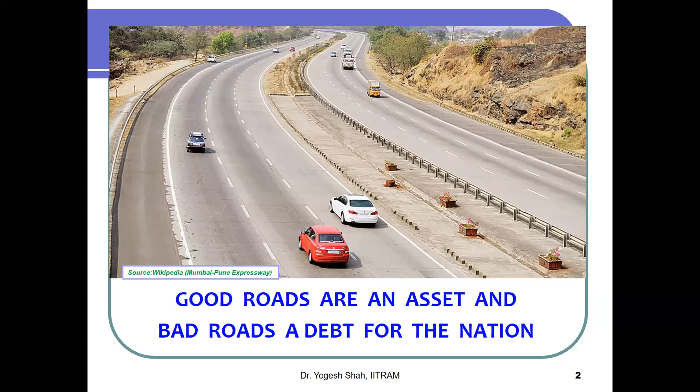So this topic of pavement evaluation is basically a part of the asset management system, we can say. If we broadly try to look at what is an asset management system, this asset management system diagram is with reference to transport infrastructure facilities. It might not include other components of infrastructure, but mainly I'm focusing on transport infrastructure facilities.

With reference to that, if we just try to see this diagram of asset management, there are different components which include tunnel management, bridge management, road furniture management, and winter management. Specifically in regions where there is heavy snowfall in winter seasons, you require a special management system and skills to clear off that snow so that traffic may not be stopped for a longer duration. And one component that you can see is pavement management system.

I'm just trying to open the pointer. Is it visible? Red pointer, is it visible?

Any one of you can just verify. Okay.

Pavement management system is one component of asset management, and under that pavement management, one part is your pavement evaluation. So pavement evaluation is again a very important component of a pavement management system.

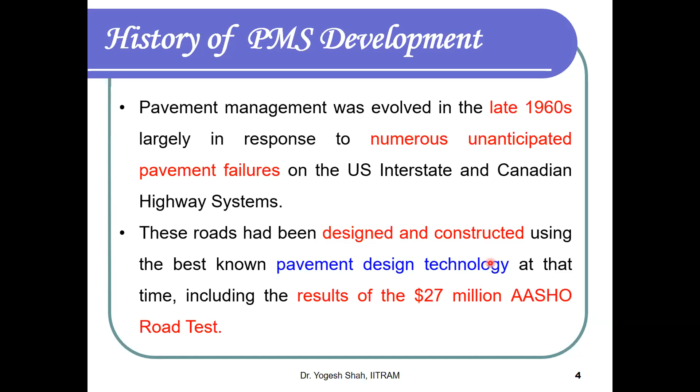They conducted a test track which consisted of both flexible and rigid pavements, constructed with different types of materials and mixes in different sections. Over a period of almost 9 to 10 years, they collected data related to the failures and distresses that take place on the road surface with time, age of the pavement, and other parameters, and then analyzed it. That is how the pavement management system evolved.

What is the benefit of PMS? I will just quickly go through these parts.

If we talk about pavement management system, the title makes clear that we are supposed to manage our pavements. So when we say manage, we are more focused on maintaining or managing the maintenance of your pavements. It gives you answers to various questions, like what is the need, why you want to go for a PMS. The answer can be that looking at the condition, you may say that your road is not in a serviceable condition, and that's why you want to go for maintenance of the pavement.

The second question is, how much money will you require? Third, let us say you require X amount of money, but you have only X minus N amount of money available. Then the question is how to optimally use the available resources. That can also be an answer obtained from a properly designed pavement management system.

The next set of questions can be, what is the best time to apply some sort of maintenance to your pavement? What kind of treatment will you use for a particular type of failure, and what strategy should you follow?

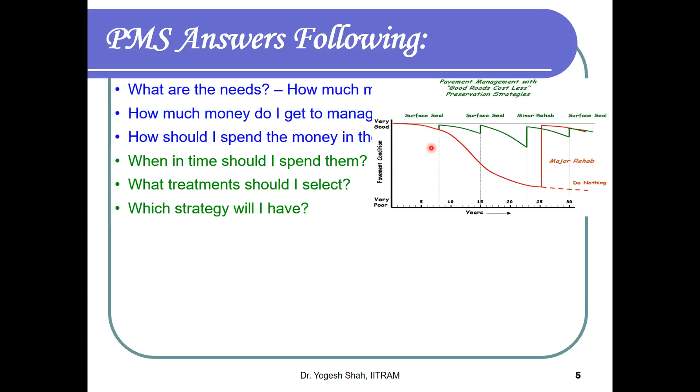Then if we talk about treatment, there are four different types generally available: routine, preventive, rehabilitation, and reconstruction. As you go from top to bottom, the type of treatment given is of higher quality, and the cost of maintenance also increases. Obviously, reconstruction means your pavement is completely failed and you have to reconstruct it.

So that is your second point, that you have to decide wisely what kind of treatment is to be applied. The third is strategy. Here also we generally have two strategies. Either you go for fixed maintenance, that is, you schedule it every 3 years or 2 years, and carry out an overlay on top of the existing road, or second, a condition responsive approach.

You carry out a proper evaluation using various evaluation techniques. You collect the data for distresses, and then decide the type of treatment based on the condition of your existing pavement. So that can be the strategy you may like to adopt, any one of those.

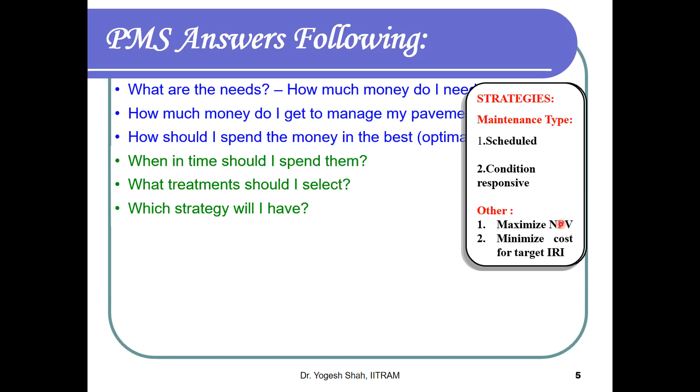And similarly, if we talk about with reference to the economic parameters, NPV is net present value. That is one economic indicator, like what will be the maximum return if you are investing something. Obviously, anyone investing a huge amount of money will expect a good amount of returns from that investment. So if you are having two or three options for treatment, we generally have a strategy to take the one which is going to give you the best return from your investment.

At the same time, the second strategy can be minimize your cost to a target IRI. IRI is basically a roughness index, the International Roughness Index, which is one sort of parameter to measure road unevenness. The unit for IRI is meters per kilometer, that is the total amount of unevenness in meters per kilometer of your road length.

So if you go for the second strategy, let us say your existing IRI is 4.5. Now you have two options. One is you maximize NPV, so in maximizing NPV, it will select any one option where your IRI will be fixed at 2.5. That is the best possible, but obviously the cost also will be high.

But if you go with the second option, that is minimize the cost to target IRI, then you can fix your IRI. If my current IRI is 4.5, I want to target it only up to 3.5, I don't want to go lower than that. So accordingly it will give you the option that this is the maintenance option which will give you an IRI of 3.5, and obviously the cost of investment is also going to be less.

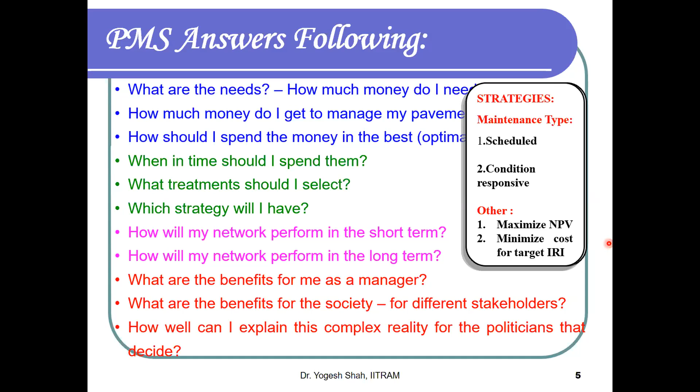Obviously, when we gather a huge amount of data at the time of evaluation, we can use that data for research purposes. We can develop various models which will help you in predicting the distresses in future. We can also have models related to cost, what is the total cost over a period of 10 years required to maintain the road in a particular serviceable condition, and so on.

So now coming to the main content of the presentation. Having this background of pavement management system, now we are going to talk about rigid pavements and the pavement evaluation techniques. In the first few slides, we are going to just have a highlight of what are the available IRC guidelines for rigid pavements. Those who are dealing with concrete pavements should at least be aware about these different IRC guidelines which are available. IRC is Indian Roads Congress.

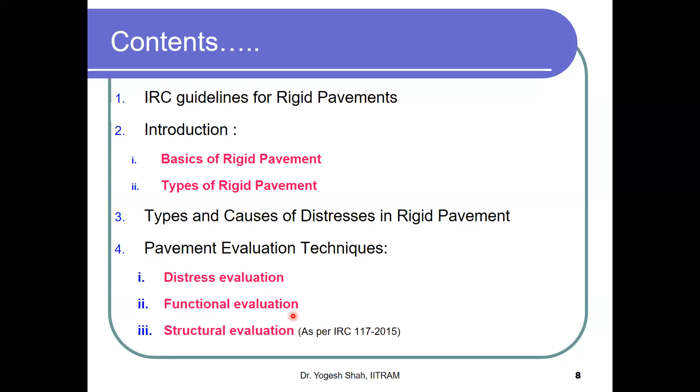So this is the first list of the codes which are relevant to the design of concrete pavements. I have prepared it into three categories: one is for design, second is for maintenance, and the third one is for construction. So these are different codes for design of concrete pavements. Obviously, there can be different components of a concrete pavement which can be designed using these IRC codes. So here IRC 58/2015 is the code which we generally use for designing plain jointed rigid pavements for highways.

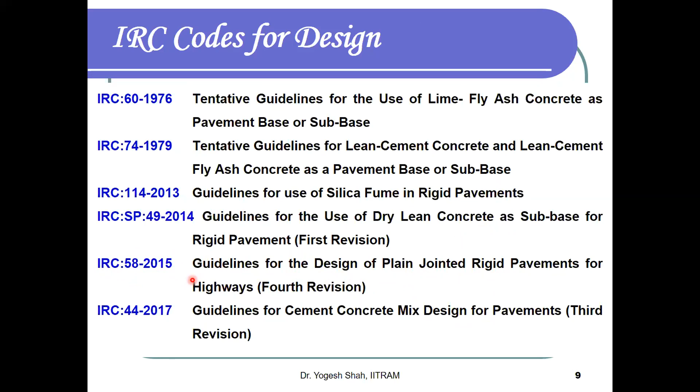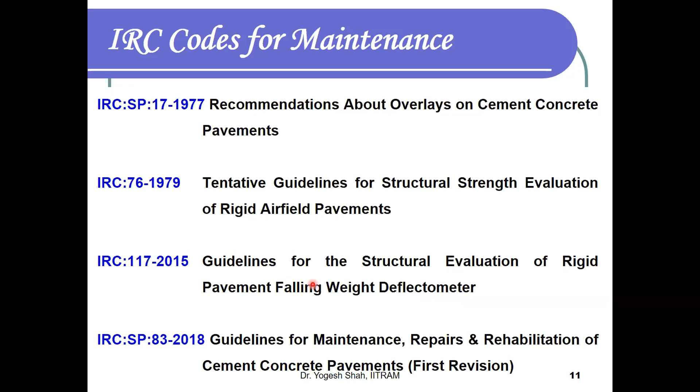So falling weight deflectometer is one latest equipment which is used in order to measure the deflections on your concrete pavement. And based on that, we can have an idea about the remaining service life of your pavement, whether it is in a condition of transferring the loads properly or not, whether there is some void formation in your concrete pavement or not, and so on. This kind of analysis can be done using this FWD. That also we are going to talk about at a later stage.

Here I would just like to mention a few important components of rigid pavement. One is dowel bars. Dowel bars are generally provided across the transverse joint, and they are one of the load transfer devices which are used. So whenever a vehicle load comes across this joint, because of the dowel bar, the wheel load from one slab may be transferred to another slab without having any cracks or faults at your joints. So for that, we have these dowel bars provided at a transverse joint.

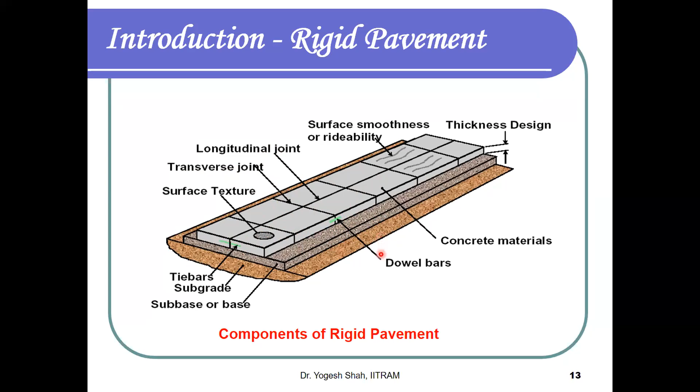Similarly, along the longitudinal joint, we have tie bars. More or less a similar function we have for tie bars also. The other components are already known, so we are not going into much detail. Why I'm focusing on dowel bars and tie bars is because we are going to talk about them at a later stage under pavement evaluation techniques also.

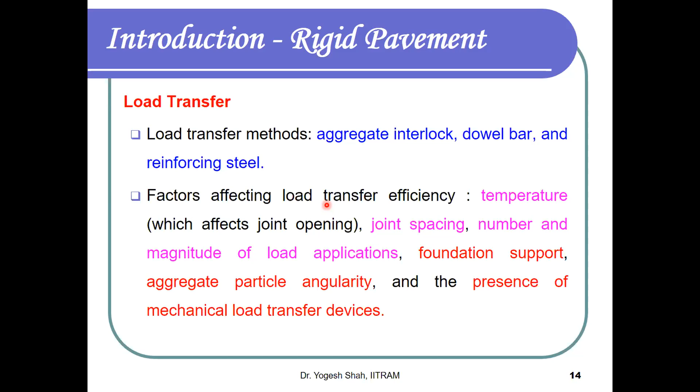There are many factors which affect this load transfer mechanism. When we talk about pavement evaluation techniques, we are also going to talk about the failure of the load transfer mechanism, like when we can say that your pavement is not effectively transferring the load. There can be many reasons: failure of the dowel bar, rusting of your dowel bar or tie bar, dispositioning of the dowel bar, and so on. That we will discuss again at a later stage.

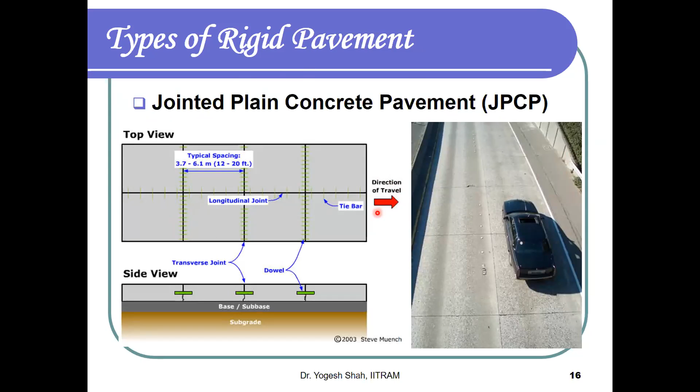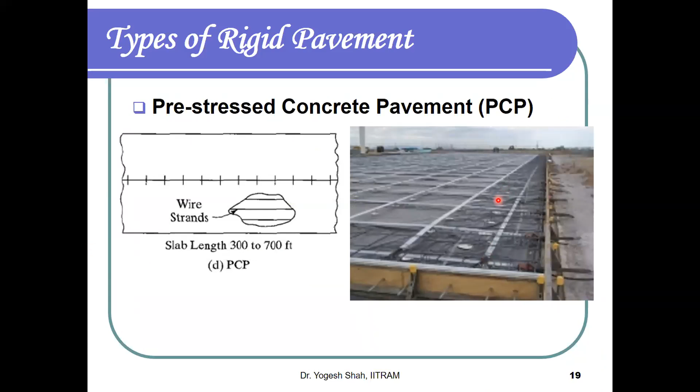Then joints. As I told, these are basically the discontinuities that we provide in the concrete pavement. If you are going for CRCP, then we don't have any discontinuities. But in the case of JPCP and JRCP, we have joints at regular intervals, and there can be transverse joints as well as longitudinal joints, as I have already shown you. Transverse joints can further be designed as either a contraction joint or an expansion joint. Expansion and contraction joints are provided to cater to the variation in stresses due to temperature variations.

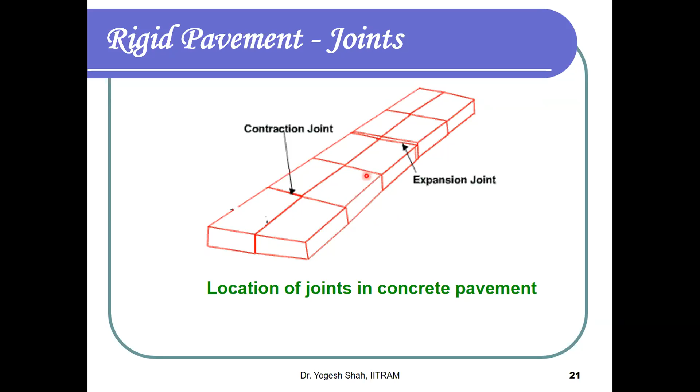Actually, for the provision of joints, we also use a special machine to cut the joint. Once you lay the concrete, after it has initially set, maybe 6 to 8 hours after laying, we cut the joints, and the depth of the joints should be specific, and the regular intervals or spacing between the joints should also be as per the design.

Then we come to the different types of distresses in rigid pavement. This is important to know, because unless you are aware of the different types of distresses, when you go for pavement evaluation you will not have an idea what this distress is and what can be the best treatment for it. So distresses, or we can say failures, in rigid pavement.

I have already discussed what a structural failure and a functional failure are. Based on those guidelines, we can classify distresses as cracking and surface defects. Surface defects means it is only on the surface; it has not penetrated into the depth of the pavement. Then joint defects: the failures or defects we find near the joints, whether a transverse joint or a longitudinal joint, we call joint defects. And there are a few other miscellaneous defects which don't fall under the previous three categories.

If we look at the classification under cracking, we have two divisions: structural distress and functional distress. As I told you, structural distress means it does not allow proper load transmission to the lower layers, because either heavy deflection is there or a huge crack is there in your pavement, so the load is not being transferred. The various structural crackings observed in a concrete pavement are transverse, longitudinal, diagonal, corner, etc.

On the other side, functional distresses only affect the riding quality or the skid resistance of your pavement: shrinkage cracks, edge cracks, durability cracking, and so on.

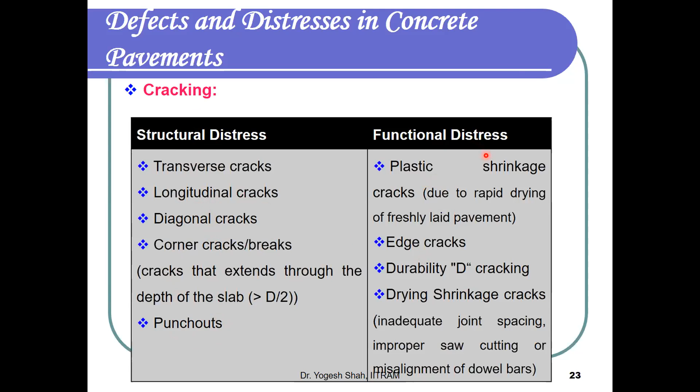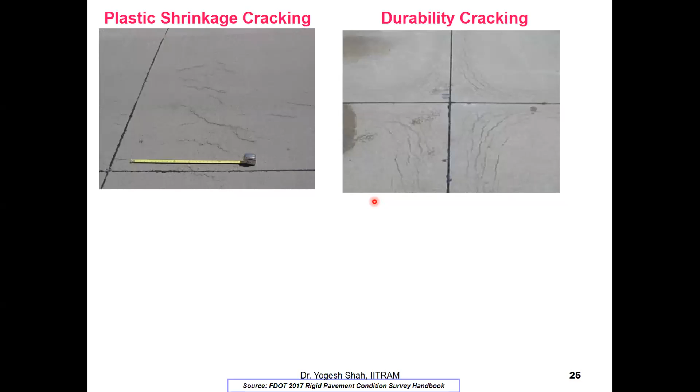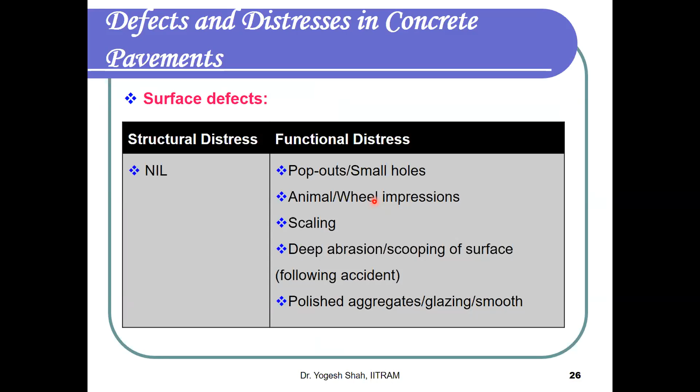And these are functional failures, which just affect the riding quality and smoothness of the pavement. Similarly, surface defects are only on the surface and have not penetrated into the pavement, so no structural distresses come under surface defects. All these defects come under functional distresses: small holes, scaling of concrete, deep abrasion, and polished aggregates. These are the types of functional distresses under surface defects.

The next category is joint defects. Under joint defects we also have structural and functional distresses. The important structural distress under joint defects is failure of tie bars or dowel bars. As I was explaining before, if the dowel bar you placed is rusted for any reason, gradually it may not stay in proper position in your concrete, it will become loose, and it will not properly transfer load from one slab to another.

The second possibility is that the bar might have bent because of overloading, or it might have dislocated from its alignment. All these are reasons for improper load transfer, and they come under structural failure, and you need specific measures to improve the load transfer mechanism. We will see in the coming slides what options are available to rectify these things.

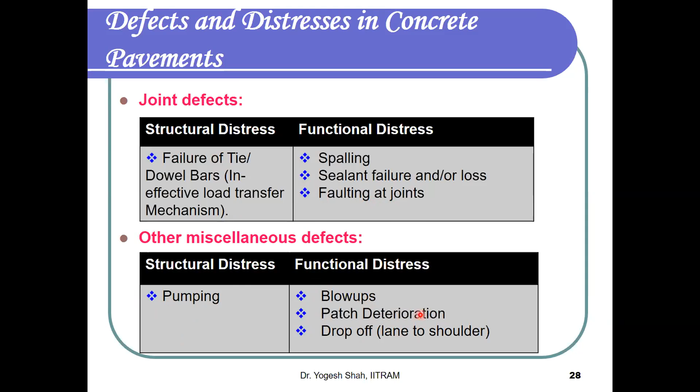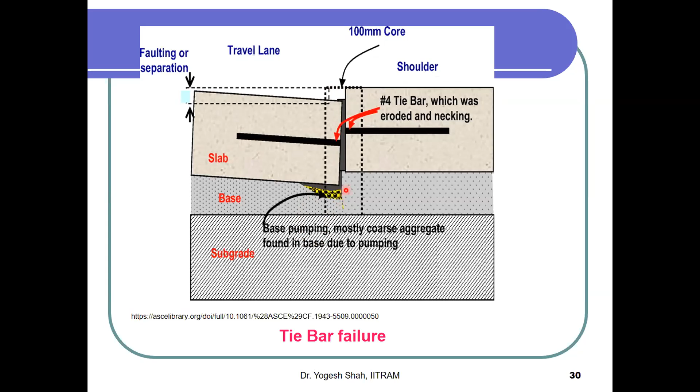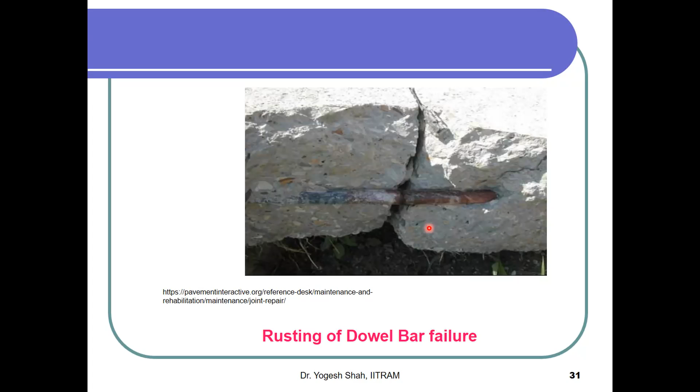And this is rusting of a dowel bar. That is also one failure. Initially it starts with rusting, and then, as I told, when the load continues to move on such rusted dowel bars, finally it will result in breaking of the dowel bar or misalignment of the dowel bars. So all these things have to be evaluated when we are going for pavement evaluation, and there are different techniques available to observe and identify such kinds of failures in your pavement.

So what are the common causes? Again, I will not go into much detail about this; this is mostly known. The main ones can be traffic, overloading of your pavement, environmental factors, then the material that we are using is not of good quality, and obviously some lack in your design. You have not designed the required thickness, or the spacing is not proper, the dowel bar diameter is not proper, the spacing of your dowel bars is not done properly, or the tie bar spacing is not done properly.

When you are providing reinforcement in JRCP, the spacing of the horizontal and vertical bars should also be designed. If that spacing is not proper in your wire mesh, then that also results in huge crack formation on your pavement surface, and so on. So there are many reasons why such distresses occur. Whenever we are going for pavement evaluation, we are also supposed to try to find out what the possible reason for the failure can be.

One more common factor observed in pavement failures is the time of sawing. I was discussing a few slides before that for giving the joints, we use a saw cutter, and we cut the slab after the initial period of setting. So generally, if you delay it 8 to 10 hours after concrete laying and then go for cutting your joints, or if you cut the slabs too early, like in the initial 2 to 4 hours, then in both cases, whether it is before or after the actual time, it is going to be dangerous for your pavement.

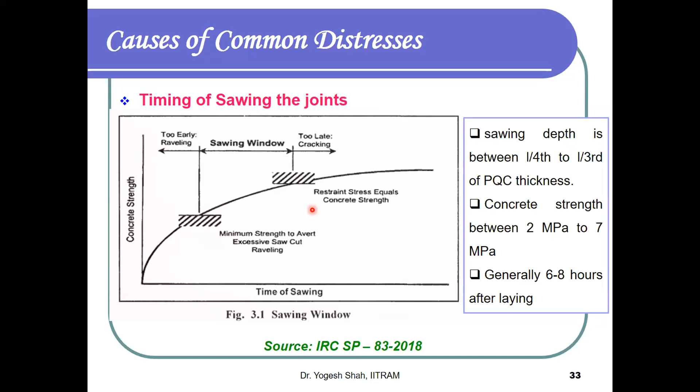Raveling means as you cut the pavement, the aggregates which are in that alignment will start coming out, and that is called raveling of a pavement. So that window of cutting the joints has to be properly maintained. And that is the common reason observed for various distresses, because as I told, joints in a concrete pavement are the weakest portion. If you handle the joints properly, then mostly many things can be handled in your concrete pavement.

Okay, so now coming to the pavement evaluation techniques. Briefly, I will first discuss what the steps are. For example, let us say you are given a stretch of 100 kilometers of a particular state highway network, and you are asked to conduct a pavement evaluation for that road network as a highway engineer. There is a proper procedure that has to be followed, and we are going to discuss those sequential steps here. The first thing is historical data collection.

The second step is initial site visit and assessment. Then field testing activities, laboratory materials characterization, data analysis, and final field evaluation report. So we are going to see one by one what things have to be gathered while following these steps of pavement evaluation.

When we talk about historical data, it is very important to gather information about the history of your pavement. History starts from your original design, then intermediate maintenance if it has been provided. If you have done any pavement evaluation before, then those records and details also have to be collected. It also includes information about the lower layers, like your granular layers as well as the soil layer on which your pavement is resting.

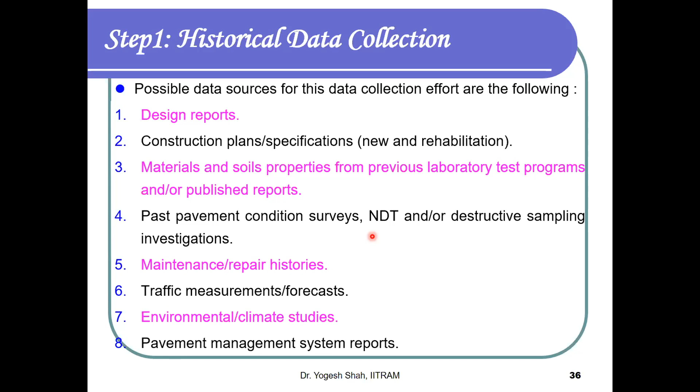Once you have that initial history, the second step is an initial site visit and assessment. In this step, we are not making any physical measurement of distresses, and no evaluation is being done. It is just an initial site inspection. The purpose of this step is that once we collect the information, we can decide what kind of evaluation is required, because as we have seen, there can be two evaluations: one is functional and the second one is structural.

From this step, if you come to know that the failures are only on the surface and have not penetrated throughout the depth of your pavement, then there might not be a need for a structural evaluation. Only functional evaluation will fulfill your purpose, and based on functional evaluation, you can recommend the maintenance strategies.

But if you find at this stage that your pavement is showing a huge amount of cracks at various locations, some portion of the pavement is completely detached, the load transfer mechanism is not proper, like you can physically see settlement near the joints, then such parameters can be reported in this step, and this leads to the requirement of a structural evaluation. So the decision whether both are required or only one is required will be based on the outputs of this second step, the initial site visit and assessment.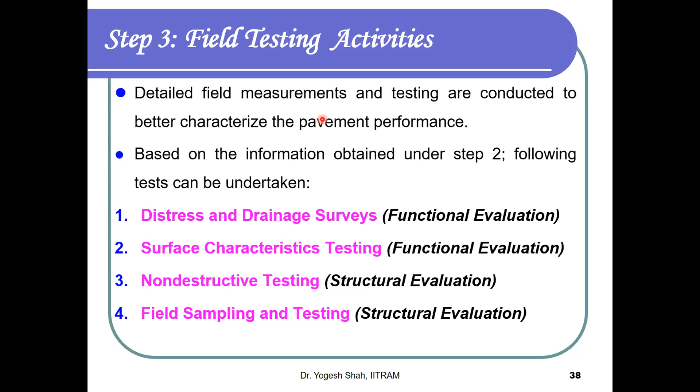So under this step, we have to use pavement evaluation techniques in order to measure and quantify the different types of distresses or failures. It may be functional, it may be structural. We are going to discuss step number 3, the different techniques available under all 4 categories, at a later stage.

Okay, then coming to the 4th step. So now what happens is, when you are going for pavement evaluation under step 3, obviously you are also collecting some sort of samples from a specific location.

For example, let us say you had observed that there is a huge pothole or a huge amount of cracking, a corner crack observed at a particular location. So when you go for pavement evaluation in step 3, you carry tools and accessories to collect a core. Generally, we use a core cutting machine, where you can directly collect an undisturbed sample of concrete core from the road, and that core is then brought to the laboratory for testing various parameters.

So you can have an estimate of concrete strength, the stiffness of the concrete. Then you can also have an idea about alkali silica reactivity, which is basically affecting the durability of the concrete. Then you can also go for petrographic testing, which is basically a micro level testing of your concrete to understand what kind of reactions are taking place between different materials or ingredients of the pavement, and how it is affecting pavement behavior. So that is your petrographic testing.

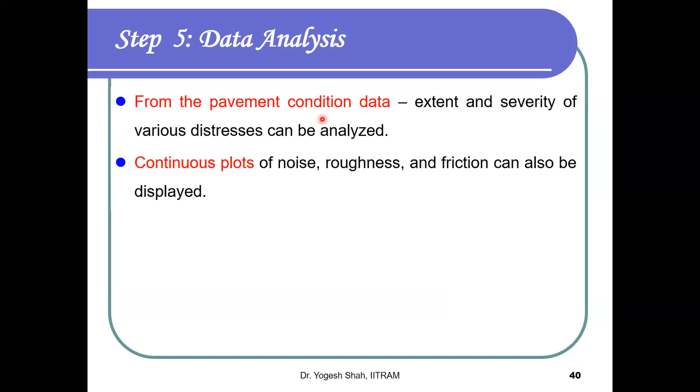Next is data analysis. So once we collect the information in step 3 and step 4, finally comes the data analysis part. In the first phase, when you collect various functional distress data, we have to derive different types of pavement condition indices from that. Pavement condition index will give you an idea about the current condition of a pavement, whether it is good, fair, poor, and so on.

So that is one form of doing the analysis, that whatever functional information you are collecting, you convert it in terms of a condition index, and that condition index will give you an idea, and based on that you decide your maintenance priority.

Second type of analysis might include preparing plots. For example, let us say you have made a measurement of roughness along a stretch of 15 kilometers. So at every meter, the variation in roughness can be plotted. On the x-axis you take distance, on the y-axis you take the roughness value, and then you have a plot. By looking at that graph, you can find out which is the place where you are having maximum roughness, and in that section only you require maintenance.

So such kind of plots can be made for different parameters, like if you are measuring noise or friction, and so on. Then the third kind of analysis is the NDT results. Like if you are using a falling weight deflectometer, as discussed in earlier slides, FWD is used for measuring the deflection of concrete pavements. So you can have a plot of deflection measurements along the distance, showing the deflection values. Similarly, we use the deflection values for back calculating the layer properties.

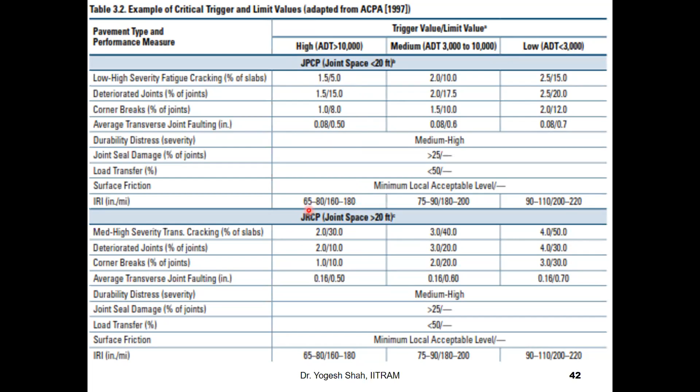That is how for different categories of roads - you can see here it is for JPCP, for JRCP, and similarly for CRCP - they have given the trigger values. This helps you know when you need to take action with reference to a particular failure, and that should be a part of your data analysis.

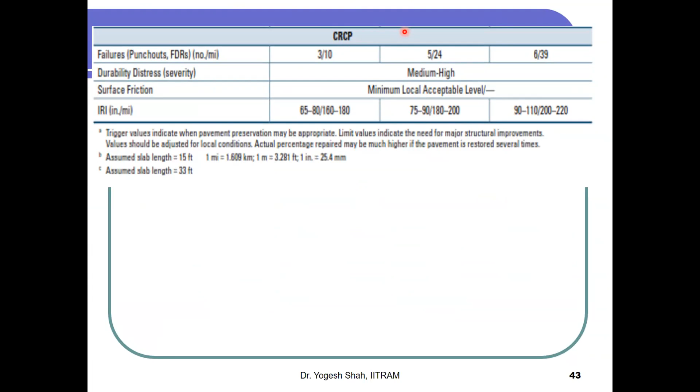The last and final step of pavement evaluation is the final field evaluation report. Whatever steps we have followed from 1 to 5 have to be reported in proper report form, and then that report is submitted to the authority for funding, because the ultimate aim is that you want money so that we can maintain our roads in better condition. So unless your reporting is very strong, very simple, and in a very understandable form, your project proposal might not be accepted.

Report writing is again a unique art that all of you should have, so that you can present the work that you have done in collecting the data and doing the data analysis. That is your last step.

Okay, so this was what we were discussing about what should be the sequence of pavement evaluation. Now we will talk about the different evaluation techniques that are available at the current stage for different purposes.

Coming back to step number 3, if you remember, I had listed these 3 points under pavement evaluation. We have 3 different types of evaluation that are generally called for. The first is distress evaluation, second is functional evaluation, and the third is structural evaluation.

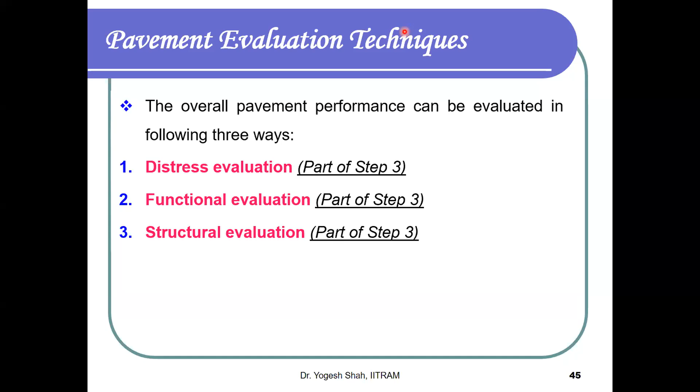Again, I am repeating, it is not necessary that for your section you require all 3. You have to decide this based on step number 2, that is initial site inspection. You have to decide whether 1 and 2 is sufficient, or 1, 2, and 3 all are required, because as you go for all 3 types of evaluation, the cost of your project is also going to increase. You require manpower, you require costly equipment in order to do the evaluation, and so on.

So let us talk about the common evaluation procedures. What are the parameters that we measure under pavement evaluation for a rigid pavement? We are just talking about rigid pavement. So the first category of evaluation procedures is distress evaluation. Here we are measuring only those distresses which are visible on the surface of a pavement. They are not penetrated throughout the depth, they are visible on the surface of a pavement.

Second is functional evaluation. Functional evaluation covers those parameters which affect your riding quality, your safety of the pavement, and so on. So it includes your roughness values, skid resistance, faulting survey, and pavement noise.

You must be aware that as compared to flexible pavements, rigid pavements make more noise. If you are traveling on the Vadodara Ahmedabad Expressway, on either side near the toll booth we have almost a 200 to 300 meter length section of concrete pavement. So you will observe and feel that there is more noise when you drive at a faster speed on the concrete roads.

So that also is a parameter which can be measured and controlled. But it comes under functional evaluation because it is not damaging your pavement, it is damaging your wheels, it is affecting your vehicle. And obviously the comfort level of a person is also hampered because of that noise. And then there is drainage. So these are the surveys or parameters which come under functional evaluation.

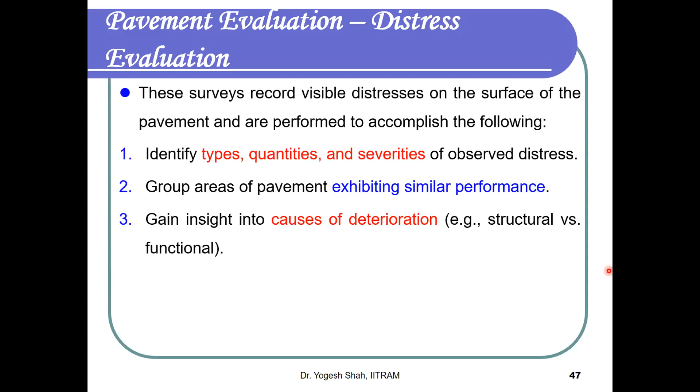Then we also try to find out the causes. I told previously also that whenever we go for evaluation, our one aim should always be to find out the reason why this would have happened, so that at least next time we can improve our design or wherever the fault is. And then we may go for additional tests if required.

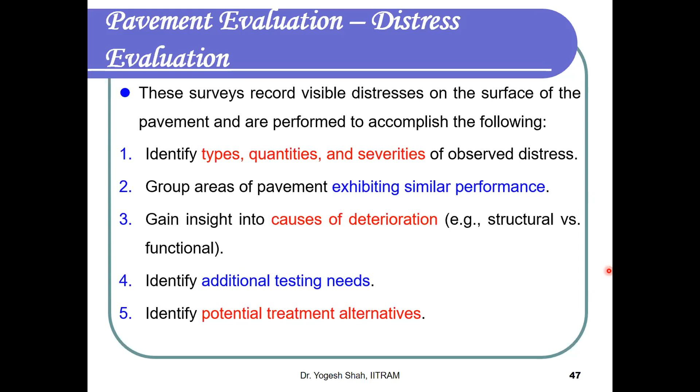So once you complete this step, it will then be clear whether you have to go for functional and structural both or any one of them. And then we can decide the potential treatment alternatives depending upon the requirement. Now, how to carry out this? So there can be different methods. The first method is a very simple manual or a videographic method.

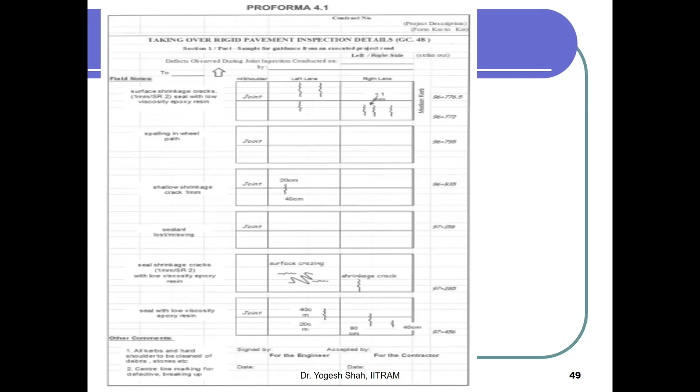So you can record the values at every 1 kilometer. Whatever defect you observe can be recorded at every kilometer, and you can have different sheets for 1 kilometer each. So if it is 10 kilometers, there can be 10 sheets for that evaluation survey. Okay, so these are some formats for recording the different types of failures. So here you can see type of defect, severity, then proposed treatment for that particular failure, and so on.

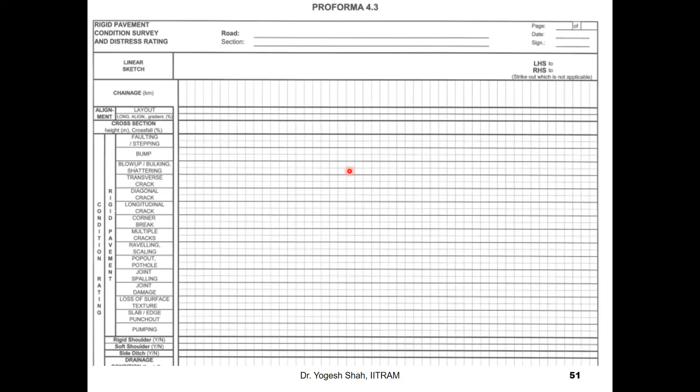This is again one more format where the list of distresses is given, and you have to just put a tick mark along with the chainage. So you have to write the chainage, and if you observe that particular failure at that particular chainage, then you can put a tick mark, or you can write some sort of description for that particular distress. So such kind of formats can be prepared, or some standard references can be used to collect this information.

The second method of collecting this is by using an automated distress survey. So in an automated distress survey, basically these are vehicles which are equipped with a number of sensors, and they can be moved at a regular speed of maybe 30, 40 or 50 kilometers per hour. With the help of the different sensors, you can capture different types of distresses, you can collect images of the road surface, and so on. And then those images can be processed in order to get the values of different failures or distresses. So that is your automatic survey method.

So here you can see there can be two methods. One is complete automated data processing. So in complete automated, what happens is you are collecting data using that automated vehicle, and you also have software along with that vehicle.

So ultimately, for example, let us say you are capturing the images. So in that particular image, whatever amount of cracking or ravelling is there, that value will directly be available to you, and then you can use that value for making other decisions related to the treatments required. So that is your complete automated processing.

And the second type of system is semi-automated data processing, where you only get the captured images, and then manually you have to write the algorithms, you have to use various image processing techniques, and using that you can calculate the values of the different distresses that are observed on your surface.

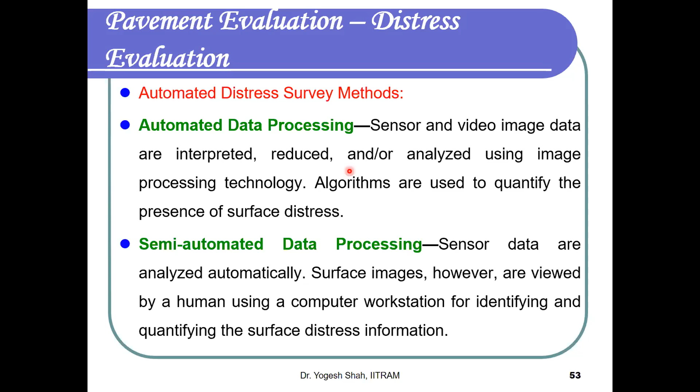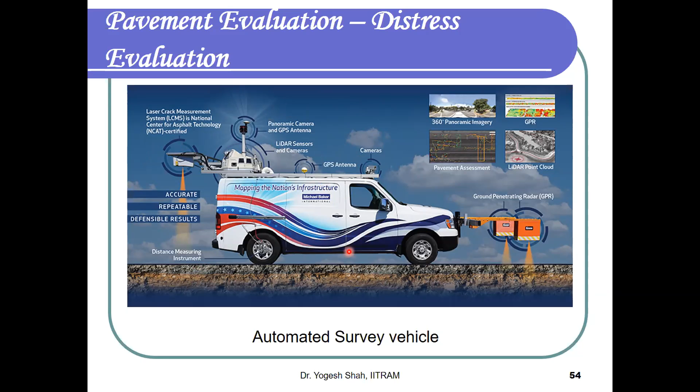Obviously, it is a costly affair, and you require a specific skill also in order to interpret the results that you get from this system. Then comes what to do with that. So once you get that information, we have to convert it in terms of some pavement condition indices, as I was discussing earlier.

So we may have IRC SP83, they have given 6 levels of distress rating starting from 0 to 5. So depending upon your measurements, you can categorize that particular road section as an excellent road condition or a very poor road condition. And accordingly, you can decide the maintenance requirements for that particular road section.

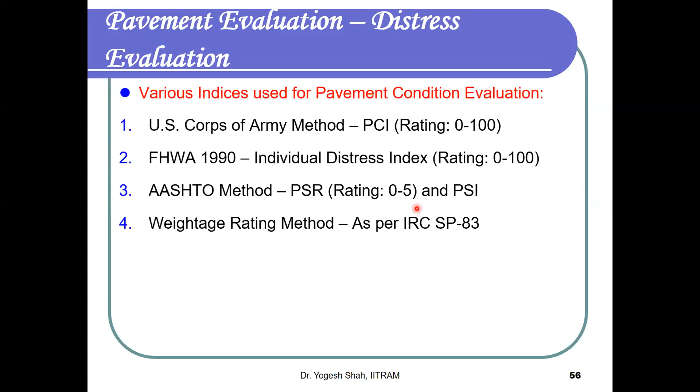Other than that, there are other methods also by which we can calculate our pavement condition indices for the measured data. So the codes or the reports which are mentioned over here can be used in order to express your values or ratings in terms of PSI or individual distress index or PSR, that is pavement serviceability rating, and so on. So different codes, different countries have their own methods of representing the data of pavement condition, and then based on that they have the selection of the maintenance requirements.

So that is about the first phase. We can have just a one minute or half a minute break if anyone wants to ask anything so far. I hope I'm not going too fast, because there are many things that I just want to cover. Okay, fine. We may continue. We can take up the things at the end.

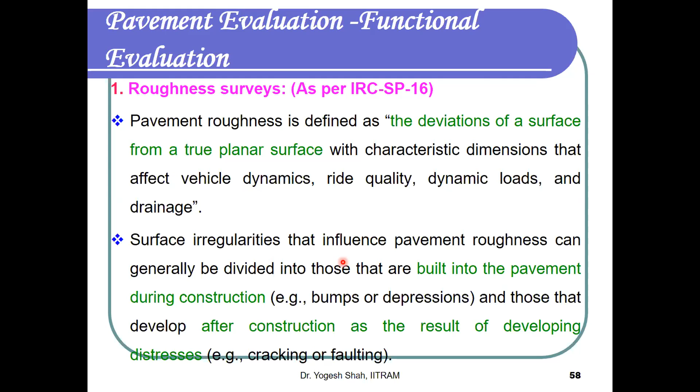Then moving forward, the next part of evaluation that comes is the functional evaluation. So in this, we are going to see what are the equipment and techniques available for measuring the functional failures of your rigid pavements or concrete pavements. So the first one that comes over here is roughness. In India, we have a fifth wheel bump integrator. Many of us use that equipment in order to measure the roughness on road surfaces. And IRC SP16 has given the guidelines that depending upon the value of roughness, what will be the category of your pavement.

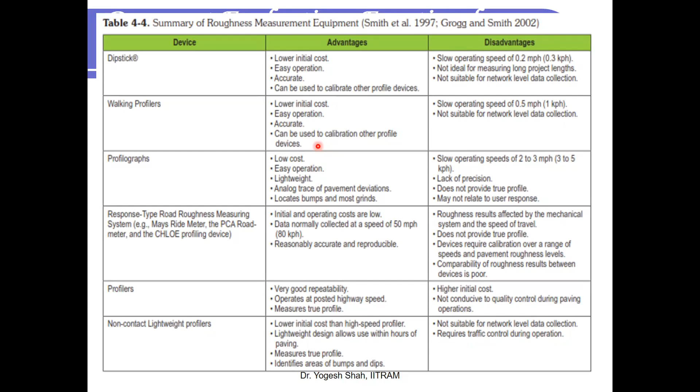So as soon as your IRI crosses 4, you have to provide some maintenance so that you can again improve the riding quality of your pavement. Otherwise, it will keep on deteriorating. Ultimately, it will increase your vehicle operating cost because your tires will be damaged if you travel on a road which is having very high roughness.

The discomfort level of the passengers will also increase. It might result in accidents and other issues also. So again, the decision on the type of treatment depends upon the value of IRI that you measure.

The second parameter is skid resistance. So each and every pavement should have sufficient amount of skid resistance. Okay, neither it should be too rough nor it should be too smooth. In both the cases, it is dangerous. If it is too smooth, slipping, skidding is going to happen.

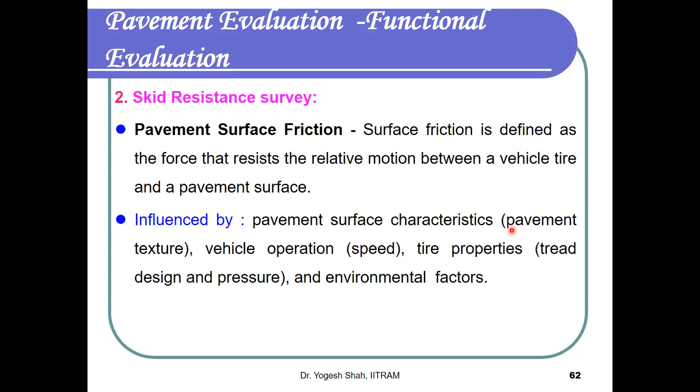If it is too rough, then as I told, it will increase your VOC and other discomfort and issues are going to be there. So it is very important to maintain a specific amount of skid resistance required on a pavement. And if we talk about pavement textures, generally depending upon the wavelengths, we have three category classifications. That is micro texture, macro texture, and mega texture. Okay, and it depends on the length of the wavelength.

So if you see, micro is very less, hardly to a length of 0.5 mm, and mega texture is going to be up to 50 centimeters. Okay, if I just try to explain you with this diagram here, you can see micro, then macro, mega, and then comes the roughness. So the roughness we are talking about is actually a wavelength more than 50 centimeters. This is up to 50, 5 to 50, and more than 50 becomes your roughness.

So if your wavelength of that texture is more than 50, it means that you are having a rough pavement, and then according to your IRI value, you have to take proper measures. So when we talk about these micro textures or this skid resistance, for that also we have two different techniques available to measure that value. So the first method, which is suggested in IRC 15, is a sand patch method.

Okay, so basically what we do is we take a defined and known quantity of fine standard sand. Okay, and then we have to spread that sand over a road surface. As you can see in the photograph, the person has spread the sand over it. Obviously, if your surface is smooth, then the coverage of that quantity will be more. Okay, it means that the diameter will be more if you are having a smooth surface.

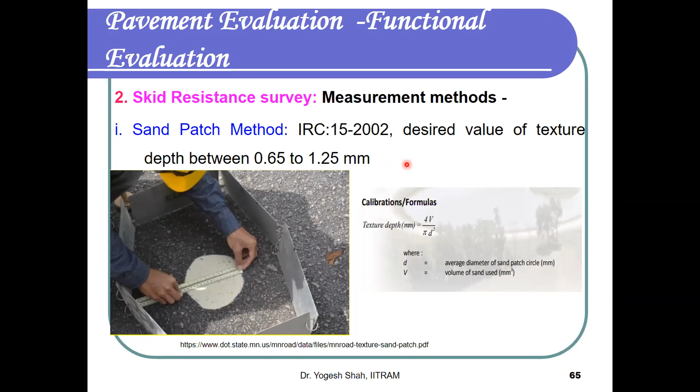So in this, you can see it is a simple equation: volume of the sand and the diameter of the sand patch circle. So the standard value or the desired value range that is given is 0.65 to 1.25 mm. If it is less than this, then also it is not acceptable. If it is more than this, then also it is not acceptable. I had explained to you the reasons for that.

Next comes the British pendulum tester. So this is again one more equipment which can be used to measure the skid resistance of your pavement. And here the unit is different. Here it is in terms of British pendulum number, and the number range from 45 to 55 is the acceptable range.

Now how it works is, it is again a simple principle. You can see this pendulum. At the bottom of the pendulum, you are having one rubber pad. So what we do is we just hold this pendulum and we try to let it flow freely. It touches your surface, and then along with this pendulum we have this marker. So depending upon the movement of your pendulum, this marker will also move.

If your surface is very smooth, then the pendulum will move very freely and you will have a lower value on the reading. Lower value means it will be in a range of 0 to 20 or 0 to 30. And if it is rough enough, then it will not allow your pendulum to move freely, and in that case you will have a very high value. That is, your marker will not go to a larger extent, and it will be somewhere around more than 60 to 80. So in both the cases, it is not acceptable. The acceptable range for your pavement in a normal condition is 45 to 55.

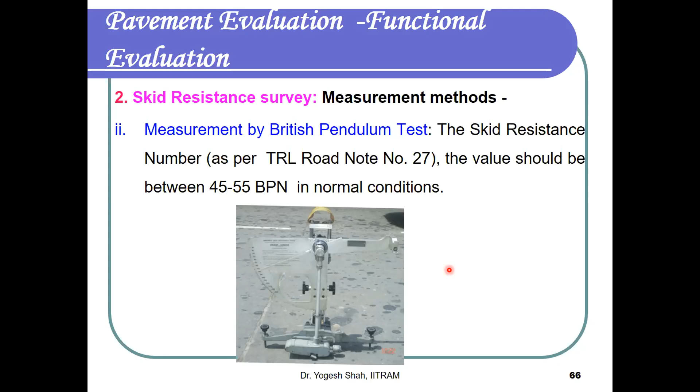So that is how a simple test is available to measure the skid resistance. That can be done at regular intervals, like whenever you feel that the surface has become more slippery, you just take any of these two methods and you try to find out the value. And if it is not in the standard acceptable limits, then we have to provide some alternate maintenance in order to improve that.

Next functional factor is faulting. Faulting I had already explained. It is basically the level difference that we have in two slabs, we have seen it under the distresses. So this is a Georgia fault meter, which is available to measure the amount of level difference. You can see here the person is holding that Georgia fault meter, and two stands are on one side of the slab and the other two footrests are on the other side of the slab, and the unevenness can be measured through a scale which is installed in that particular instrument. So that is a Georgia fault meter.

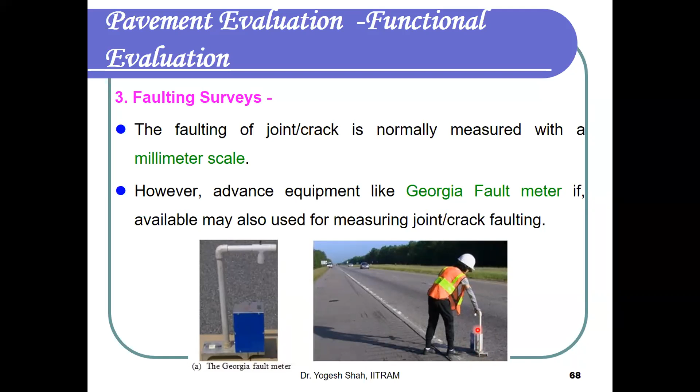The simple way can be, you just take a simple plastic scale, you put it on the surface, and then you try to measure the total unevenness between the two slabs with the help of another scale. So that is also going to give you the same thing. The unit is in millimeters.

The next important parameter which comes under functional evaluation is noise. As I told, rigid pavements make more noise as compared to flexible pavements. When we talk of noise, there are two categories of noise. One we call powertrain noise, and the second we call tire-pavement noise. Powertrain noise is because of the engine and the exhaust or the emissions from that vehicle. So that is not in our control, that is in the control of the manufacturer. But the second one, tire-pavement noise, that is in our control.

It is basically when your vehicle is moving on a road surface, because of your surface roughness and the rubbing action that takes place between your tire and surface, this noise is produced, and that noise we can control. So for that, you have to first measure the noise and see whether it is within an acceptable limit or not. And if you find that the noise is beyond the acceptable limit, then we may provide some alternate maintenance strategies to reduce that noise.

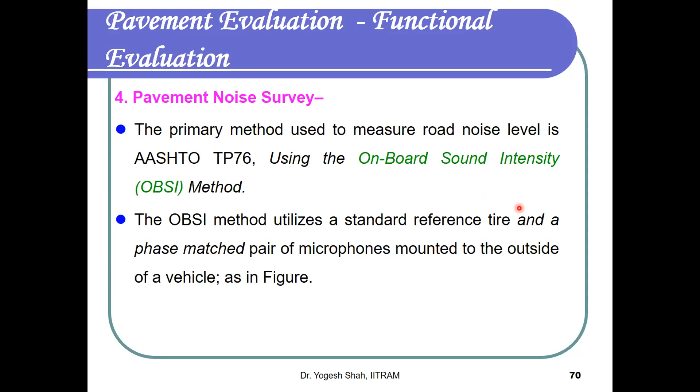And then you try to see what is the acceptable limit. Accordingly, you can make your decision whether it is okay or it is making more noise. So acceptable limit is 101 to 102 decibel. If it is more than that, it means you have to provide some arrangement to reduce the noise. So what is that arrangement?

One option can be, you can go for diamond grinding. Diamond grinding, basically it is a machine which is available, and it has a diamond grinder fixed in that, and we can provide grooves on the surface. So when you provide the grooves, noise will be absorbed in the grooves, and it will reduce its intensity. Okay, so that is the advantage of diamond grinding. So that can be done if you find that more noise is there.

Second thing is, you can have a thin concrete overlay on the top of it, because whenever we construct a fresh concrete layer, we provide grooves on the top of that. So that will also absorb your noise and reduce it.

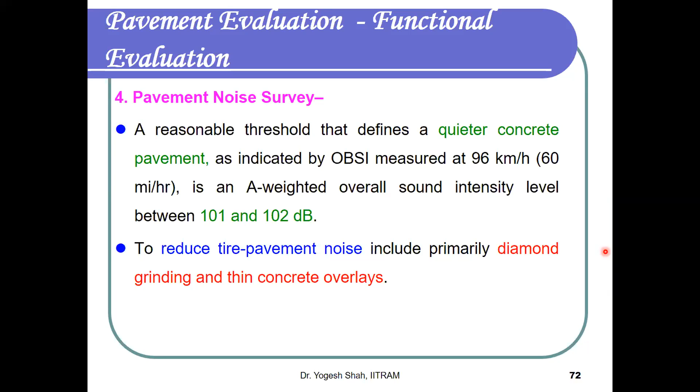The last one under functional is drainage. So I will not talk much about this because this is a very common phenomenon, and generally wherever you are constructing pavements in the areas where the rainfall is more than 500 mm per year, then in those areas you have to be very careful.

You may provide a special drainage layer in your pavement structure itself. You have to properly design the side drains, open cuts, so that the rainwater gets immediately collected in the side drains and it will not penetrate through your pavement through the joints, because as I told, joints are the weakest point, and if water accumulates on the surface, then through joints it will start penetrating inside, so that should not happen.

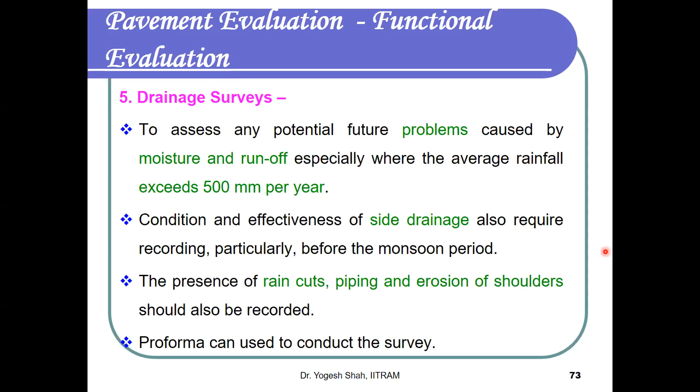Okay, the last part is the structural evaluation. I think I'm running out of time. I have 15 minutes more, so I will try to complete this, and then we may take up a few questions for discussion.

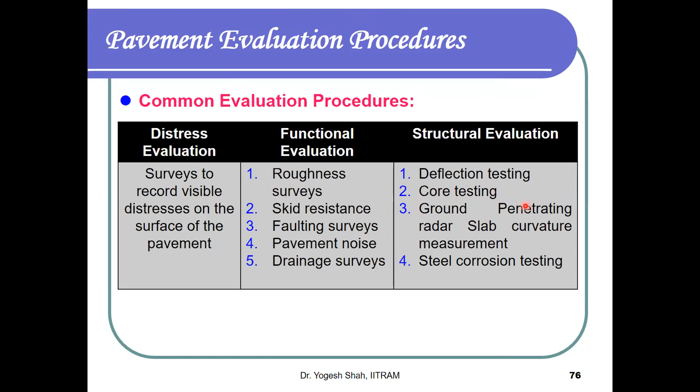So under deflection, as I told, out of these 4 things, except core testing, all others are non-destructive testing methods. Okay, so we can find out the layer thicknesses using this technique. We can find out the location of reinforcements. We can also find out if there are any voids formed under your pavement structure. Then we can find out the deflection, obviously, with the help of these non-destructive testing techniques.

You can also find out about the load transfer efficiency of your dowel bars and tie bars, whether they are performing well or not. So all those things. At the same time, you can also have an idea about the remaining service life of your pavement with the help of various non-destructive techniques. So let us see what those are. So here is a list.

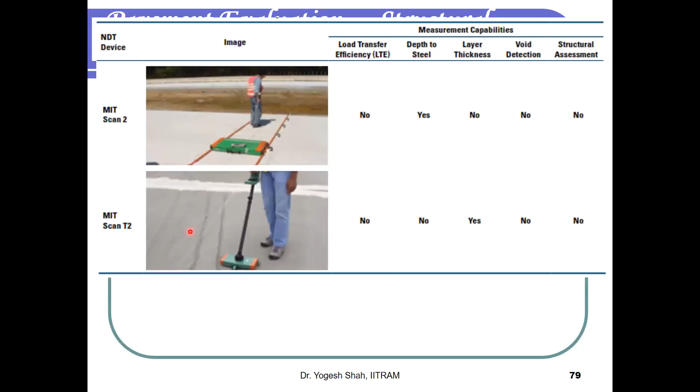The first one is a falling weight deflectometer. The second one is a ground penetrating radar. Then MIRA, MIT Scan 2 and MIT Scan T2. What are the basic differences? As you can see here, the measuring capabilities of all the equipment are different. Obviously, the cost is also different.

If I talk about this FWD, roughly, if you want to take a standard good company made one, it will cost you around 1 crore for an FWD. And in India, to the best of my knowledge, we are having only 2 or 3 FWDs which are of that accuracy. We have 1 or 2 more, but they are locally made. But of this quality and standard, we have only 2 or 3 FWDs in our country, which are being used for the evaluation of concrete pavements.

So here, if you see, depending upon the capabilities, we have this equipment. If you want to find out load transfer, FWD can do that for you. If you want to find out the depth of steel and layer thickness and void detection.

So these two parameters cannot be done by FWD. For that, you have to go for GPR. Void detection can be done by FWD, and structural assessment, that is deflection measurement, can be done by FWD, but that cannot be done by GPR.

So if you have both FWD and GPR, then you can completely do your structural evaluation with the help of these two equipments. These two are sufficient. But to have these two, it means around 1 crore for FWD and almost around 1 crore for GPR with all the attachments, because in GPR we also have different antennas having different frequency capacity. So if you want the best, the cost will also be accordingly more.

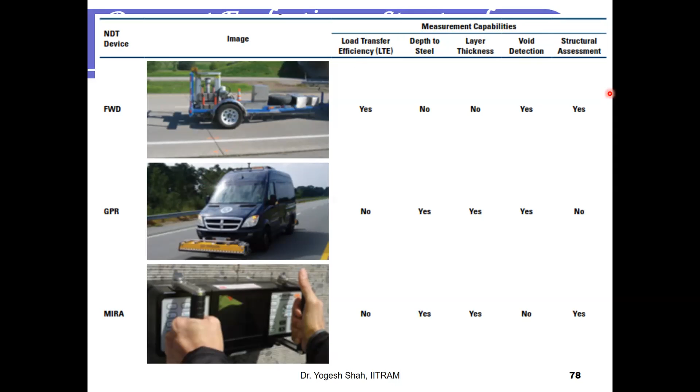So the first one is deflection measurement. Once we get the deflection values of the road surface, what can we do with this information? One, we can get an idea about the variation of deflections along the length. Second, we can have an idea about material properties by back calculation, details of which are given in IRC 117. Third, we can have an idea about load transfer efficiency, whether joints or cracks are functioning well or not. Fourth, we can also have an idea about voids.

If there are any voids in the pavement, what will happen is that when a continuous load moves on that area, it is ultimately going to break and settle. So before that, you should use grouting or other techniques so that voids can be filled up. For that, you should know the location of the voids, which can be done with the help of deflection measurements.

So FWD is a common equipment used in India, and IRC 117 is the code which gives detailed guidelines. All four parameters that I mentioned have been explained very well with examples on how to use that code to get these values.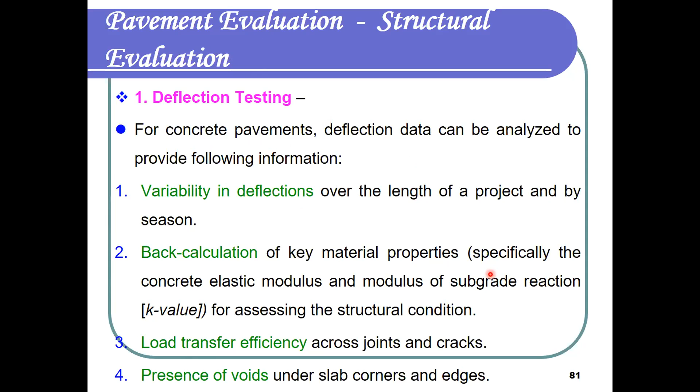Second is core testing. This is not NDT, this is a destructive testing method. We take a core from the area where the pavement slab is not in good functional or structural condition. With the help of core cutting, we can take the cores, and then they can be tested in the laboratory for different parameters like strength and modulus of elasticity.

You may even go for petrographic testing, that is micro level testing of the concrete, to have an idea about the different chemical reactions taking place, because of which durability is getting affected. So that is core testing.

Third is GPR. As I told you, different forms of GPR are available, with different attachments in the form of antennas, and with the help of GPR you can get information below the road surface without digging or any damage to the pavement structure. So here you can see...

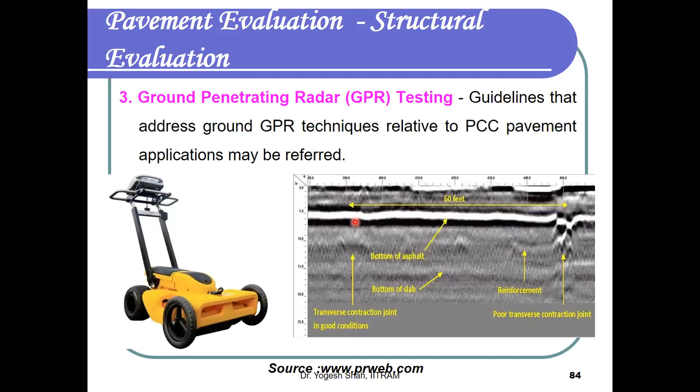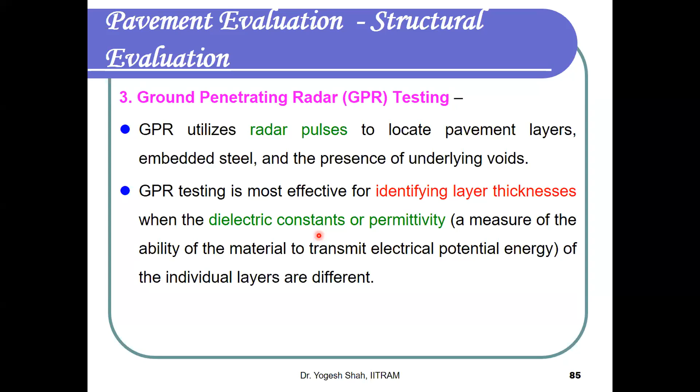Different color codes and patterns can be seen. This basically works on radar pulses — we allow the radar pulses to penetrate through the pavement, and when they come back we catch them with a receiver. Depending upon the dielectric constants of different materials, concrete will have a different dielectric constant, steel will have a different one, flexible pavement will have a different one. So depending on the different dielectric constants at different levels, you can identify that from this point to this point the value indicates steel, and from this point to this point it indicates concrete, and so on. With this, we can have an idea about the different layers and elements below the pavement surface.

So for example, I will show this figure. Here you can see this complete pattern is the same, so we can say that it is reinforcement, and depending on the value of the dielectric constant, as you go from bottom to top, you will have different values. Based on that range, you can decide what the material is in that particular layer, whether it is steel or concrete.

The next is a slab curvature measurement. This simply measures the curvature of the slabs. You fix your LVDTs or dial gauges at different locations on the periphery of the slab, and then try to find out the difference in warping along the x-axis and y-axis, and based on that you can decide whether any treatment related to that warping distress is required.

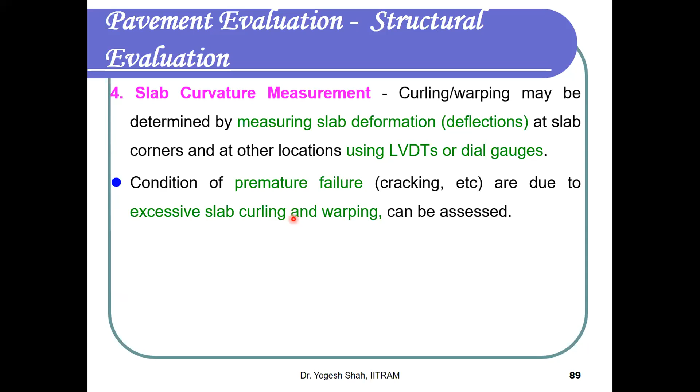And the last one is corrosion. Generally for corrosion, sometimes with the help of GPR you can get an idea whether the steel is corroded or not, or otherwise you may have to take cores. When you take a core you can physically observe it, as I had shown you one picture where the dowel bar was corroded. So physically when you take a core, you can tell whether it is corroded or not. If it is corroded, you need to replace it with new dowel bars or new tie bars, as the case may be.

So that was all about different equipment available for distresses, functional evaluation, and structural evaluation. As we don't have much time, I will not go in detail about IRC 117/2015, but I will just show you one small video which shows the working of this equipment.

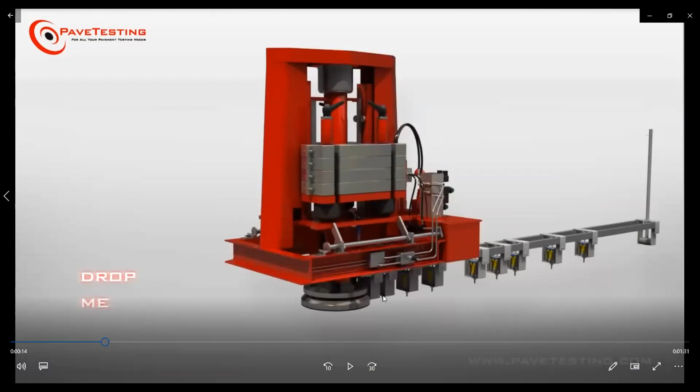So this is a falling weight deflectometer, a small video. This is basically the equipment. Here we have sensors, as you can see, and they can be adjusted at an interval that we want to define. Generally we place it at an interval of 300 millimeters, so you get a complete basin of deflection measurements - 7 to 9 readings can be taken on one side, and we consider that similar deflection will be there on the opposite side. If you join it, you get a complete basin of deflection measurements with the help of this equipment. This is the place where we allow the load to fall, so basically it's an impact load allowed on the road surface, and because of that an impulse is created which gives you deflection measurements at regular intervals.

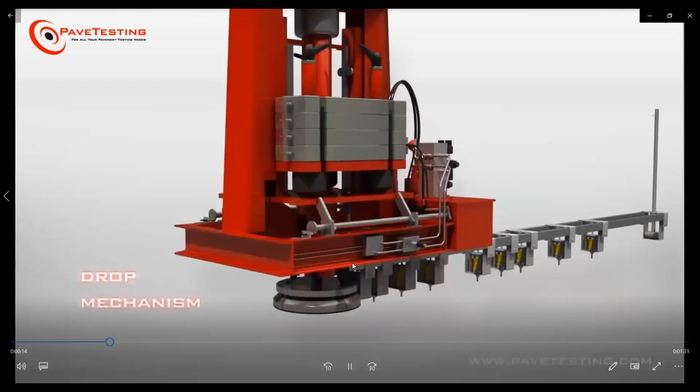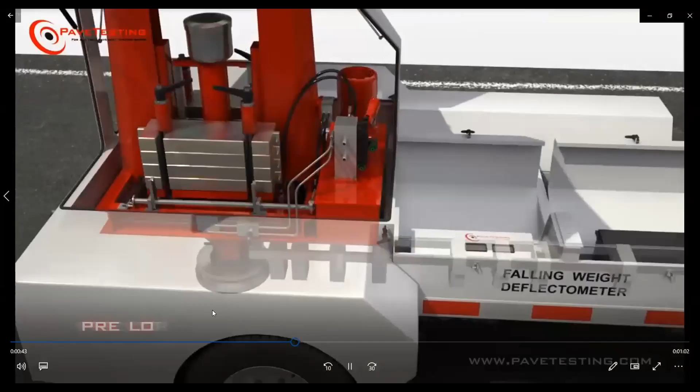I will continue the video. You can see this is a drop mechanism. These are different sensors, yellow colored, you can see the pinpoint - these sensors touch the road surface, and this is mounted behind a vehicle. This is completely weather protected, so in an emergency, if there is sudden rainfall, you can just cover it and protect your equipment. These are different plates of loading, so depending upon what load you want to test, you can allow the drop. You can see the frame coming down, and then suddenly the load is allowed to drop on the surface - this drop creates the impact. The impulses transfer through the sensors, and gradually as it passes on, it measures the deflection across that section.

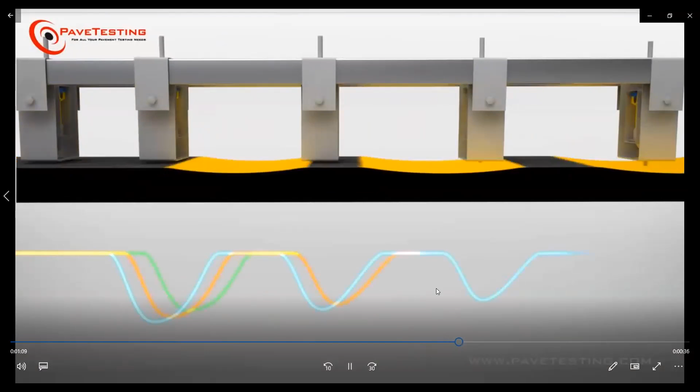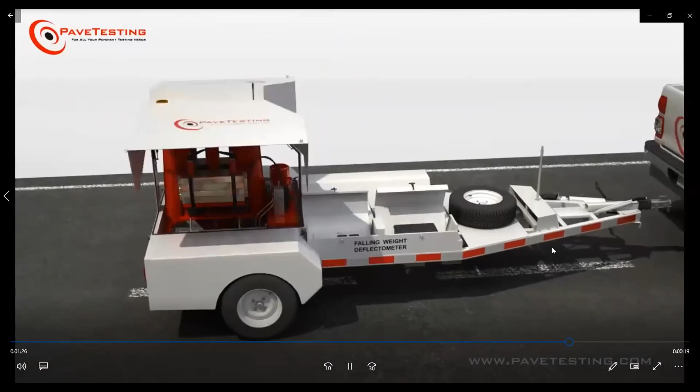This variation in deflection - obviously at the place where the load is applied you get a maximum value of deflection, and as you move away from the load application, the value reduces. So once the test is complete, the frame is taken up again, it is covered, and then you can move on to the next point wherever you want to take deflection measurements - drive to the next location. So this is the small video I wanted to share, showing how this FWD actually works.

Just a minute, I would still want to share two or three slides, because we don't have much time to discuss the working in detail.

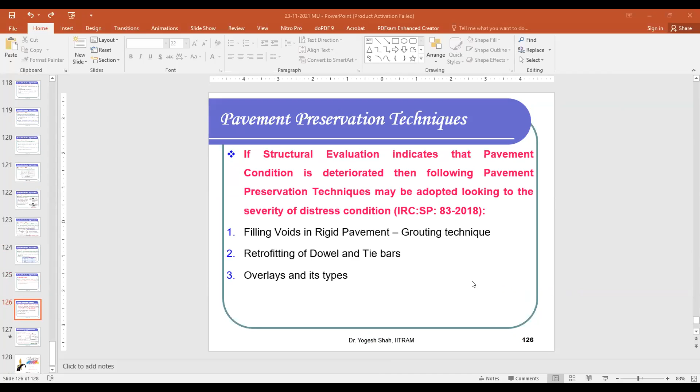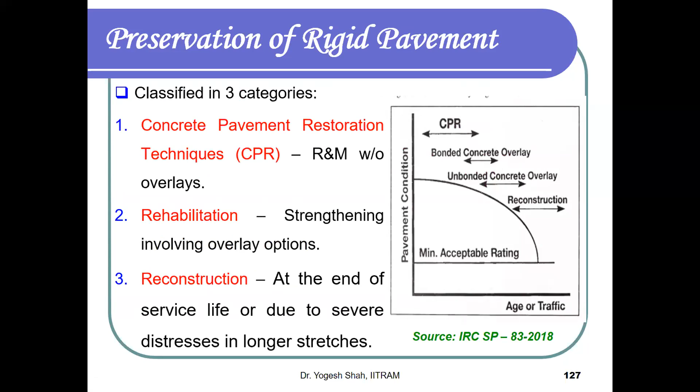Now, just two or three things - after your evaluation, if you find there are voids in your pavement layer, what technique is available? You can go for grouting; we know grouting techniques well, and these can be applied to fill the voids wherever found. Similarly, retrofitting techniques are available for dowel bars and tie bars, which can be adopted if you find the load transfer efficiency is not up to requirement. Third, if you find deflection values are too high and the pavement is completely deteriorated structurally, then you may go for overlays - that is, constructing a new concrete pavement on top of the existing pavement. So these are basically three types of preservation techniques for rigid pavement: the first is concrete pavement restoration, CPR; the second is rehabilitation; and the third is reconstruction.